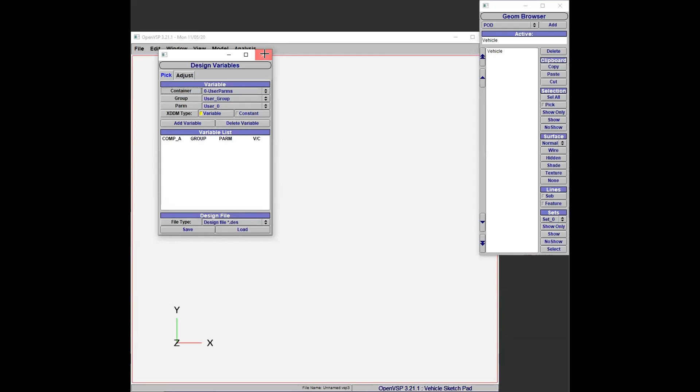There are design variables that you can list out here. Those design variables get integrated into the optimizing algorithm, so it can cyclically optimize the variables as you want. I'm not going to talk about optimization of the aircraft wing or anything, just want to highlight that.

The most important one is here, where you can see the mass and inertial properties of the designed vehicle. Most of all, you'll use the VSP Aero module, which is for aerodynamic analysis of your model. With that, let me go into the other tabs you have here, and you can see what they do.

So how do you add the vehicle model? The vehicle model isn't exactly the model, but the components are already there. I'm going to show you that. For some reason, I can't drag it down. Oh, I'm sorry.

Okay. Is it okay? Can you see it now? Okay, yeah, we can see the screen.

All right, thank you. So here you have plenty of components you want, like the fuselage, the wing, and some stack blank items. The propellers, if you want, are there, and discs of different types, like a box group to add inside the vehicle so it represents interior objects, mostly for weight analysis. You can add components like boxes and different types of ducts for the engine part, and also add seats and pod mounts and so on.

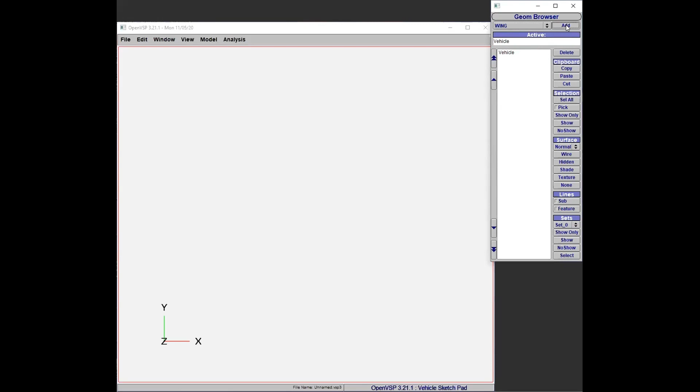Mostly what I use is the fuselage and the wing, and the wing can do everything you want. So let me go with the wing and then we'll see the rest. Click on the wing and then click add, so you get the wire version, or the wire view, of the wing section only. Now you can click on the shade here.

You see, if you select shade, it will give you the shaded version of the wing. Let me drag this thing down. You can call this a blended wing body type of aircraft.

Now there are different terminologies you may see here. I will talk about that. We have the airfoil, first of all, the airfoil at the center, and the other airfoil at the tip. I'm not sure whether you guys have the basic terminologies of aerodynamic components, like airfoil, ribs, span, and chord, and so on. If not, just stop me somewhere and ask me what it is.

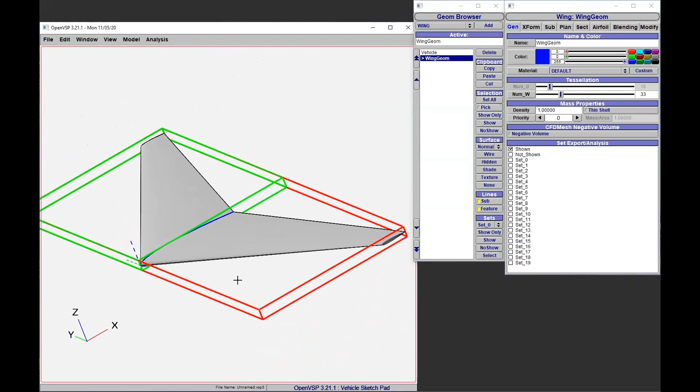So now we have this thing. Before I go into modifying it, the wing span is the distance from this tip, the lower tip to the upper tip. And you have the length, which is right from here up to the end - that is actually the chord length of the airfoil, the central airfoil.

So you can modify this, but if you want to see the length of your wingspan, you just go into the plan, click on the plan, you see the span. This is the total span you have.

By the way, I didn't tell you that OpenVSP doesn't have a specific unit for you. You can assign yourself whatever unit you want. Like if you want to go with the centimeter, this is like 18 centimeters. So you can do with that, or maybe you can go with feet, inch, whatever you want. But you have to keep the consistency of the unit when you do for the rest, once you decide in your mind.

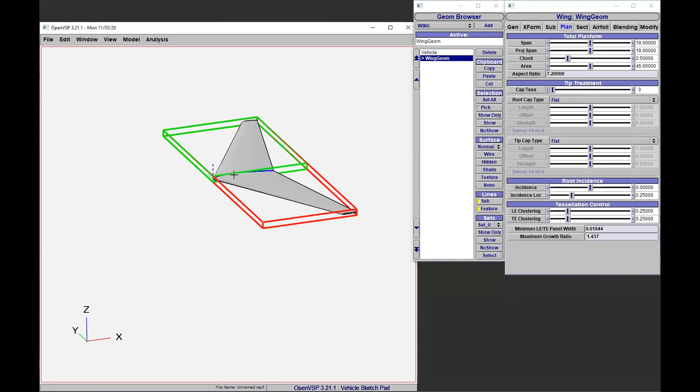And the other thing, as I said, OpenVSP is for vehicles that have a maximum speed of Mach 1, which is not more than the subsonic level. If you go more than subsonic, the solvers you use for aerodynamic analysis of the vehicle don't work well. There are so many assumptions you have. That's why OpenVSP is limited only for the preliminary and conceptual phase of any vehicle design.

So you got the span here. Let's say this is 18 meters. So keep in mind that we are working with meters, and you have the projection span, which is the shadow of this span on the ground, which may not be the same as the span of the aircraft itself if there is some dihedral type of shape.

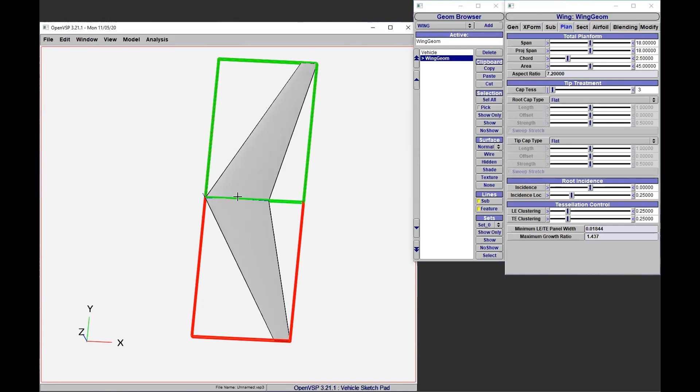And so you have a chord, which is the mean chord in this case. The mean chord is the average of all the chords. You have the chord lengths of the central airfoil, the chord lengths of the tips, and so you get the average of that. That is the mean chord.

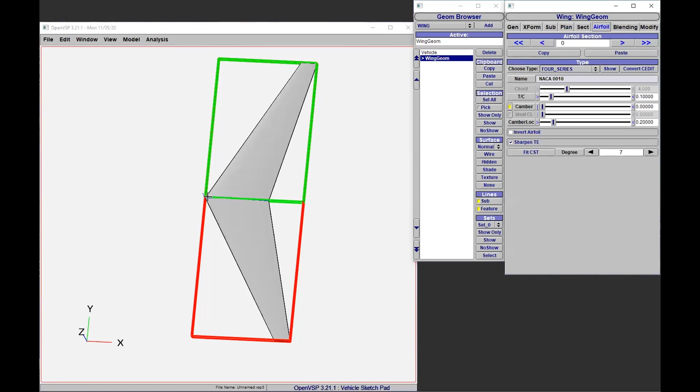So now you can drag this one if you want. Like if I want to modify this one, I just go to the airfoil because this is airfoil. Now airfoil 0 is for the central part. So I can drag this. I'm sorry, I have to go to the section part because I have to increase the length, not the thickness. So the section, normally the section is what you see in green, is one section.

If you have a split of that, let's say I have a split now, so we have 2 sections now. So click on the wing back. By the way, you can rename it also. You can call it whatever you want, BWB. You can call it, and if you leave it, it will name itself. So you have a section right here.

Now I want to extend the central airfoil length. Go to the section, and this is the section now we are talking about. The section has now, this is the section planform. You can see here section planform. You can increase the span. The span means the length of the section itself. So you can increase it if you want.

Or if you want, also you can increase the airfoil. There are 2 airfoils of the section, the external and the internal airfoil. The external one is which one? It's just outside of the central part. So this is the central here.

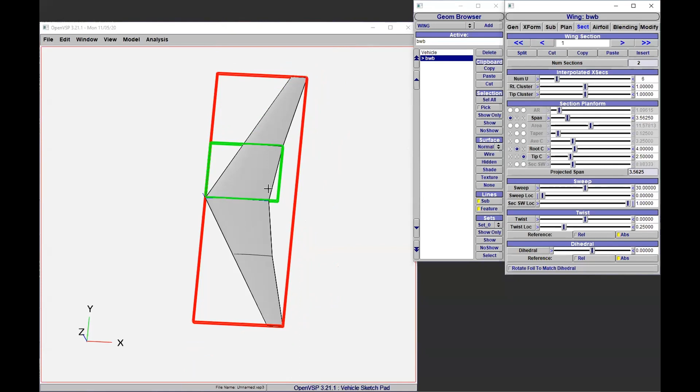Now let's do some tricky things. I mean, that's not tricky, but you can modify the length of the airfoil right here. You have a root chord and you have a tip chord. The root chord is for the central part. Always toward the center is the root. So you can right click, I mean drag the chord, so you can increase it as you want.

And also you can do the same for the tip. The tip by now is this one. It's not that one because we are talking about the section. You can also drag that as you want.

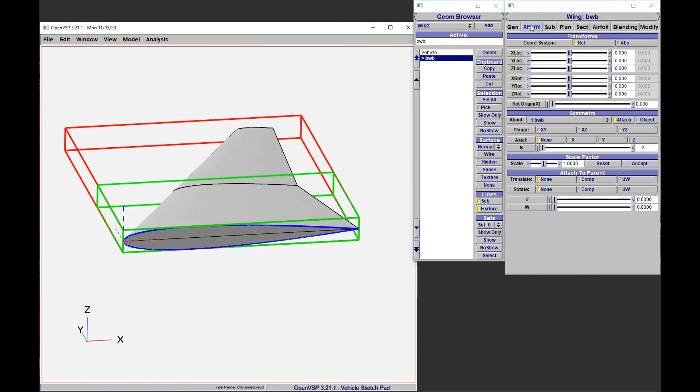And if you want to increase, by the way, I can show you this is symmetric, so I can cut it into half. So I can show you only one wing because everything you did for this wing applies for the other wing. So you have symmetry, right? If you click on the second tab, you have symmetry here. This one, you can click the symmetry, you can see it. You can avoid it, whatever you want.

So, but anyway, if you want to see from the side, it's better to have a single wing, one side of the wing. So now let me, by the way, there are some tabs that you need to click to view your vehicle from different directions. In the view, you can see here mostly the F5, which will give you the top view, and F6 that will give you the front view.

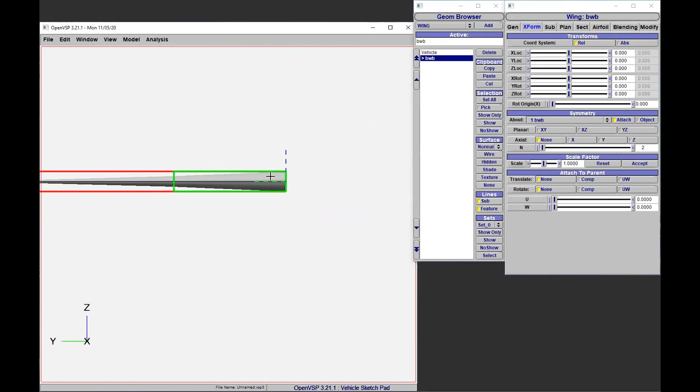You can go through this. This is the F7 side view and so on. So I'm going to go with the F7, the side view.

This is a symmetric type of airfoil, and usually this type is used at the tip of the aircraft because it doesn't produce any lift at a zero angle of attack. So we normally use that at the tip to avoid turbulent flows of air on the tip side.

So I can go to the airfoil now. I can increase the thickness of the airfoil, like you see here. I can increase the thickness of this airfoil as I want. You can drag it, or you can give the number here.

Remind you here that we have no unit specific, but keep in mind that you are working with a certain unique unit in your mind.

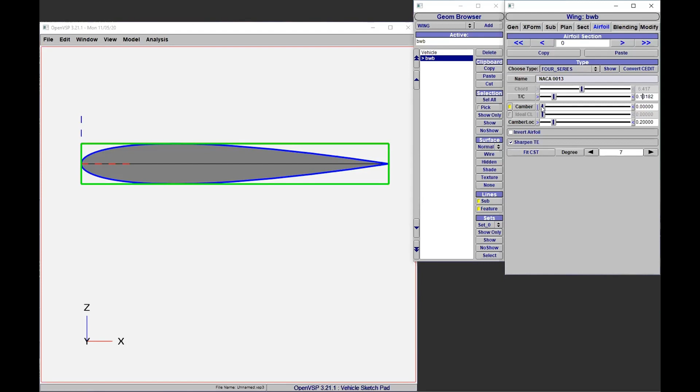So the other thing is, there is no camber for this, it's symmetric. You can add the camber, you can bend it as much as you want. And you can also decide the camber location, the maximum thickness location. You can drag this one, the maximum thickness will move back. If you see, it will move back.

This actually depends on what you want to do, in which area of the wing you are applying this airfoil. You also have options to select from the type listed here. You can choose from this whatever type of airfoil you want, so it's up to you.

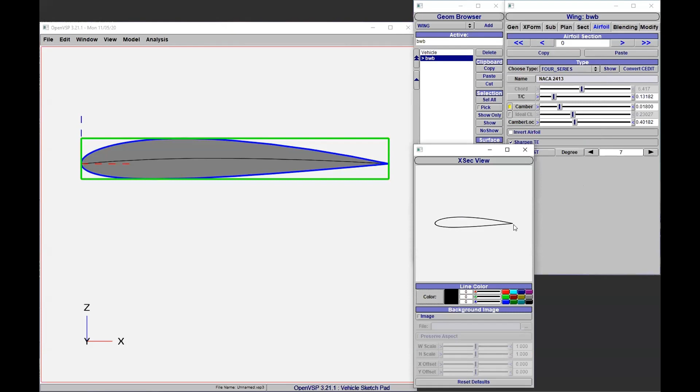Also, you can see this line view of the airfoil you are working with, and if you change the thickness, you will see the change also right here. Especially if you don't have this view, you can directly view it right from the show. And the other thing is, let me bring it back.

There are some tabs that I don't use, like the Convert CEDIT tab. There's an invert airfoil also here, but I don't know what they use that for. If you click here, you can design.

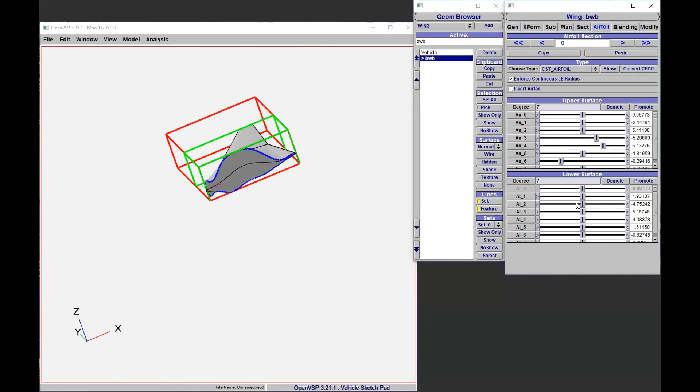You can give each point of the airfoil by yourself, and you can modify it as you want. Especially if you are doing this blended wing body type of aircraft, you have to design the interior part by yourself manually because of your own special interest. The central part is not basically for aerodynamic lift, you have to primarily look into what you will have in the interior, what components you have.

So you have to determine whether the thickness of the central airfoil and the subsequent ones close to the central should be enough or not for the objects you want to load inside the aircraft. So that's one thing you see here, you can select different types as you want. The best thing about this OpenVSP is that you can see the changes right away. It's parametric type, you can just give the number or drag the scroll, and then you get the shapes you want.

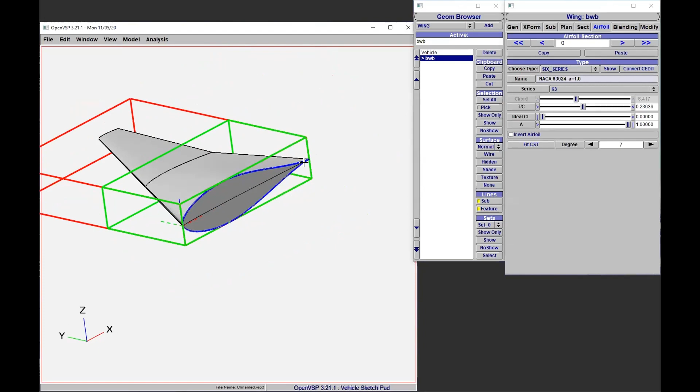Now, what else do I have to see here? This actually is to move your section or the wing itself to either X, Y, or Z, or you can rotate it. Now, if you drag this one, you're moving the wing back, especially if you have the airfoil. Let me add the fuselage.

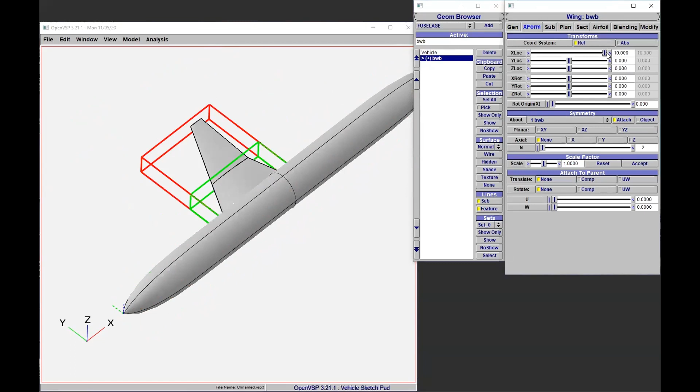Let me add the fuselage and see how we can do that. Let me go to the shade. Now the shade, so I can move the wing backward. So I'll click on the wing part and drag it backward. If it's like at the end, it's not end actually, you can click on the arrow and then you get more, you can move it more back.

There's no problem in that, and also you can increase the size, as I said, and you can bring back the symmetry. And now this, if you see, like I can do this, I can hide this one. You can hide this one if you want, no show, you just click on no show, so you can see here.

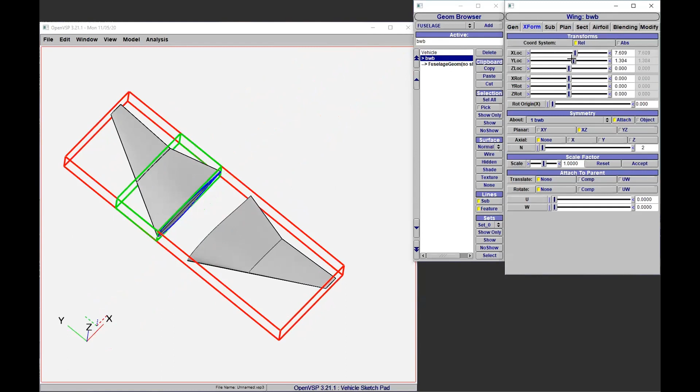And now I want to move the wings apart because there is a fuselage there. So click on the wing and go into this XForm, and then if you drag this one, the wing will move apart. Now bring the fuselage back, you can see it, NoShow. So you can see it now. You can move the wing as you want.

By the way, OpenVSP is not only for aircraft, it's for any like rocket design, for ground robots, like underground, I mean underwater type of vehicles. For anything you want, you can design right here in OpenVSP.

I mean, for the design part at least, the aero part is not so important. Now I can cancel the fuselage, I don't want it now. For now, I'm going to deal with the wing.

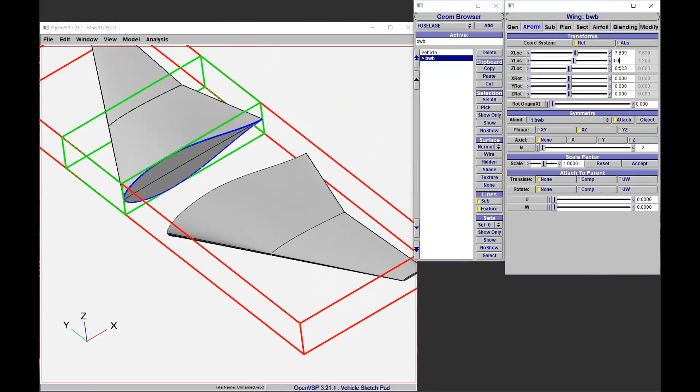So bring back the wings together. This is a blended wing body type. Now we did that, and also if you want, you can change the colors right here. You can go into color and change whatever color you want from the drop down right here.

But it's not that important. And also indeed, if you have different components that you want to visualize, you need to have different colors. So that's it, as I said, the section is there.

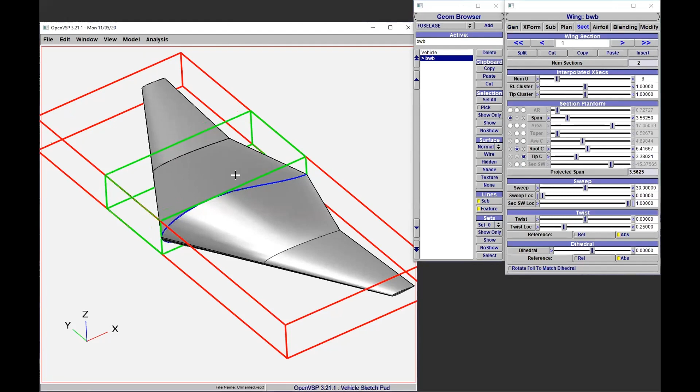One thing I have to talk about is the section. Actually, it's one more thing. Now we are dealing with this section. I think this is not visible. Let me change that into the default one.

Well, yes, now the top view. One thing I did here is it has to come to the origin. You can drag it, you can zoom in and zoom out. If you hold the scroll button of your mouse, you can bring it out and in.

And also you can do other things with the right click and left click. The right click is actually to move it, I mean move around. And then the other one is to rotate. The left click is to rotate, and you can exercise this.

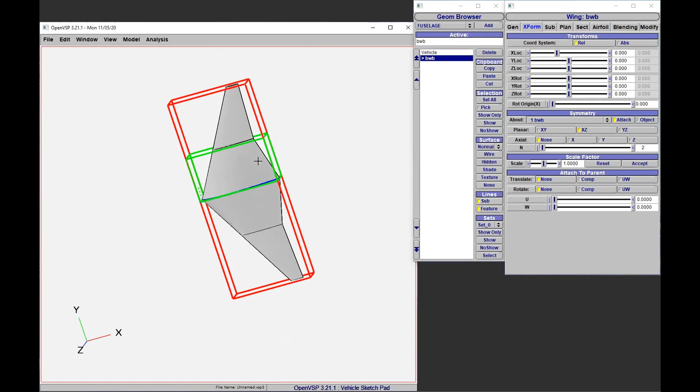Now let me go to the section part. I'm talking about this section, and let me give the front view. The front view of the vehicle is like this.

The importance of this dihedral is, if you want to make enough lift during roll, you have to design the vehicle in such a way that the wing somehow bends upward, so that when it rolls, say for example to the left, if you have a bended wing right here, you still have some lift generated by this wing side. So the dihedral type is very important.

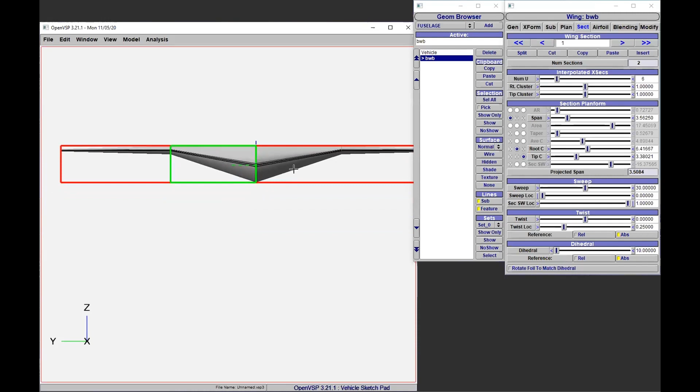It actually depends on the type of mission the aircraft is designed for. The dihedral is there, and also let me go into the... so we did this.

The dihedral is there. Also you can twist the wing, especially the outward wings. This wing at the end, or the tip area, you have to twist it somehow upward from the back, from the trailing edge, because if the aircraft is to stall...

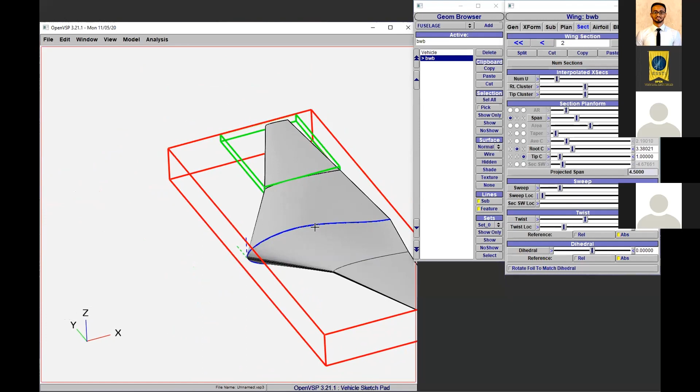Normally you have the control surfaces like aileron on this tip. If the aircraft is to stall, it has to stall in the interior part first. And if you twist it up, even though the aircraft stalls in the interior, this surface still generates lift, there is airflow on this surface. If there is airflow, then the control surface like aileron will bring the aircraft back to normal. So normally they do twist for that reason.

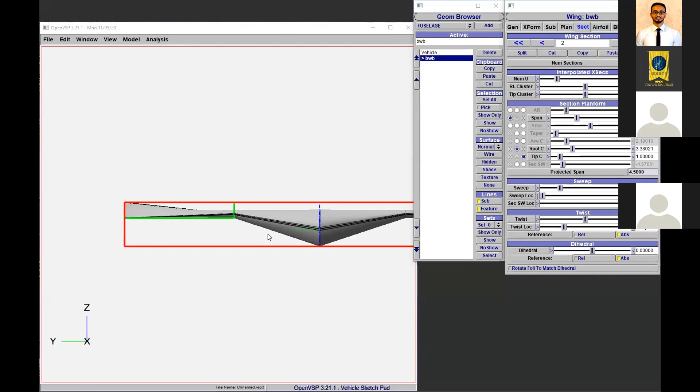We have to twist it up. So this is exaggerated indeed. As I said, if the angle of attack is very high, the aircraft stalls because there is not enough lift generated by the aircraft surfaces over the central part.

As you can see here on the tip, there is still the surface which is touched by the wind, which is called the wetted surface for now. The wet surface is the surface on which the wind flows. So at least you can have control of the aircraft by the ailerons you have at this area at the tip. That's why they make a twist.

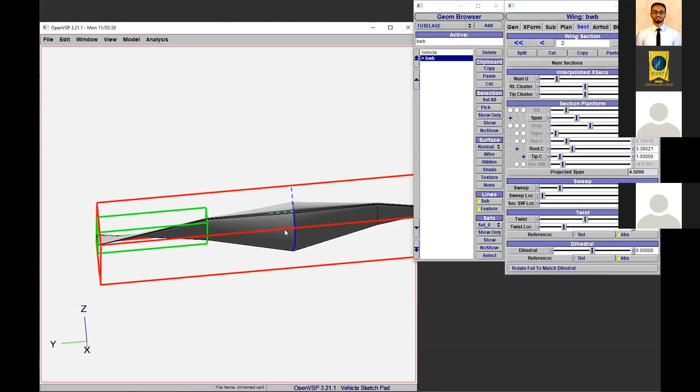Anyway, we'll bring it back to normal. We don't need it now.

The other thing is you can go to the blending. Blending is normally used to smooth the leading edge areas and the trailing edge areas.

For example, let me add more sections into the aircraft, click on section, and split it. Let's say this tip is rotated—I mean shifted back. That should have been a sweep back instead.

So if you want to get back, you just click on undo, edit undo, and you can get back to the original shape. Now let me sweep it back.

If you sweep, you give more angle of sweep, say 50. As you can see, the edge is not smooth here, and also it's not smooth here.

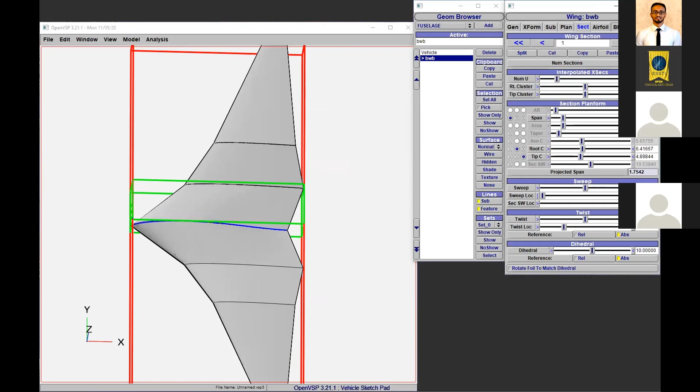If you want to smooth it, and if you're satisfied with this shape, you go to the blend—there's the leading edge and also the trailing edge. The leading edge of the aircraft is at this edge, and the trailing edge is there. So you can smooth, for instance, this cornered section.

Let me go into the leading edge and select the outboard. You have options—you can use angle to make the leading edge smooth. For example, an angle of 40 may not smooth it that much, but it tries to smooth it somehow.

If you reduce this down to 20, you'll see a more smoothed shape. So you can use angle, or you can go into the outboard leading edge. The outboard is always from the central section to the tip.

Now we are here on this airfoil—the outboard is this one. So you go into the outboard leading edge. This is the trailing edge, so we don't do that now—this is the leading edge.

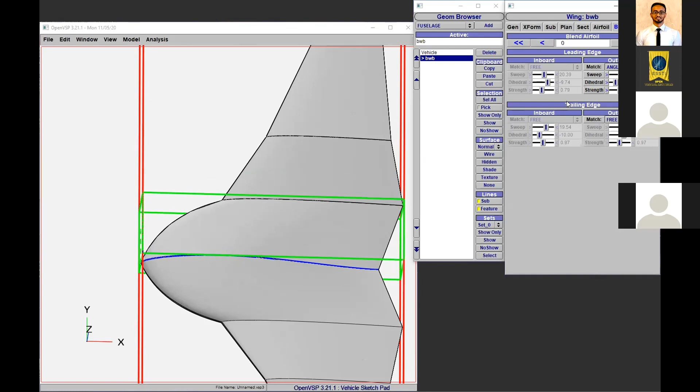So you can go and add strength if you want to the leading edge. You can add the strength, but that's not enough—I can't see much difference indeed. Okay, we'll see in the others.

If I go into the other airfoil here, let's say this has to follow the inner leading edge, which is this one. So whatever you have in the outer part of the airfoil has to follow the inner one. That's how you get that type of smoothing.

You can increase the strength, but normally that will mess up everything if you're not careful. So we have this, and if you want to scale any airfoil, just click on modify here.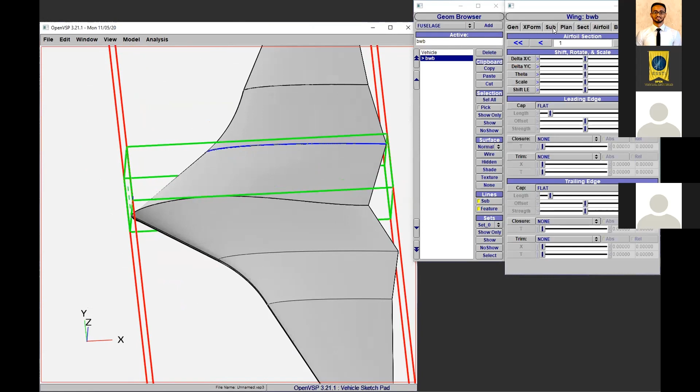Click modify, and you have shift, rotate, scale options. Shifting means you can shift it backward—let me go with one of the airfoils like here. Now you see the blue line showing the active airfoil we're working on.

So you can scale it if you want—go into the scaling and let's say 1.5, and see what happens. As you can see, it scales in every direction, including the thickness, not only—

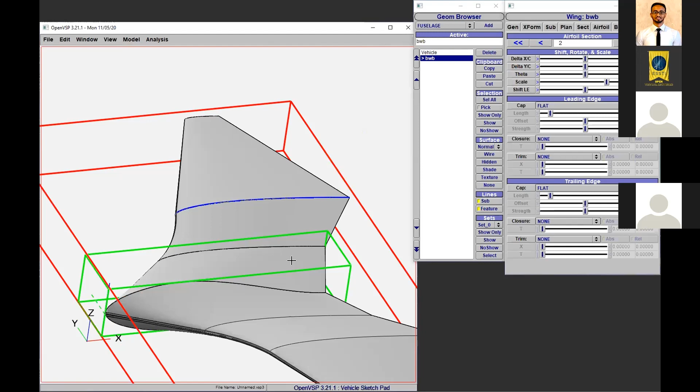The tip of the aircraft is actually designed for a specific purpose, like reducing some turbulence.

Now with that, you can go through everything: the leading edge, the trailing edge, you can modify, and there's also blending for the trailing and leading edge. We have different types of airfoil selections, and you can add your own airfoil if you want.

You can click on here, I guess this is on airfoil—click here, and you have to click read to bring in the airfoil from your own source. Actually these are enough, and there's no specific need to bring in airfoils unless we design a special type of aircraft.

Oh, I can get back to the original shape. Now, is there any question? Please, if you have a question, raise it before I go ahead.

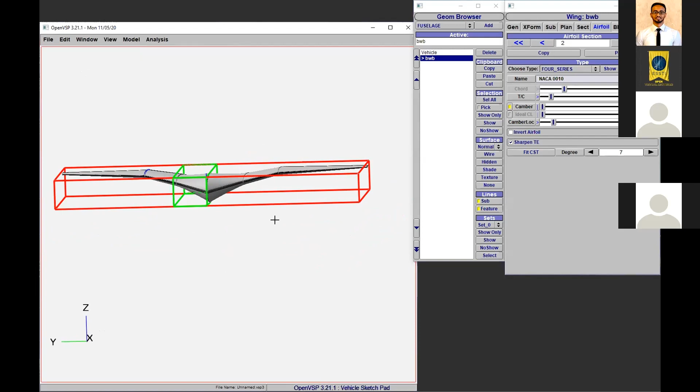Any question? I'm going to go on to how to create the control surface, the aileron, of the UAV or aircraft.

So if you don't have any questions, let's go to the control surface. If you see here, there is a sub-surface. You can click on it, right here it says control surface. Don't go with the line, rectangle, and so on. You just go with the control surface because we're going to do the control surface design. Click on it and then click add.

Now see that the ailerons are right here, but you can shift them span-wise. You can shift it like this, and also move that one to the tip. Move it.

You can also increase the area of the control surface depending on the control and stability of the aircraft, or normally that's what you have in mind. Sometimes after you do some aerodynamic analysis, you'll see that the control surface assigned is not enough to control the aircraft, so you have to add a bit more surface by clicking on the chordwise direction. The chordwise direction will give you this - like only 25% of the chord length is used for control surface. You can add that if you want, like this, using this.

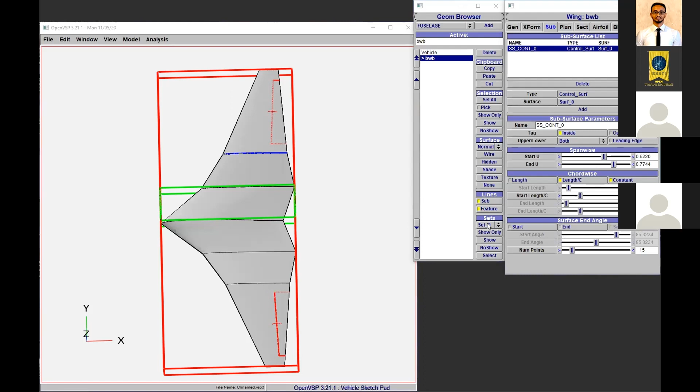The other thing we'll talk about is how we can put the angle of the ailerons in VSP Aero. Now I have to go into the simulation after we do this aircraft design, and we satisfy ourselves that it's okay. Then I will go ahead with VSP Aero, the aerodynamic analysis of the vehicle.

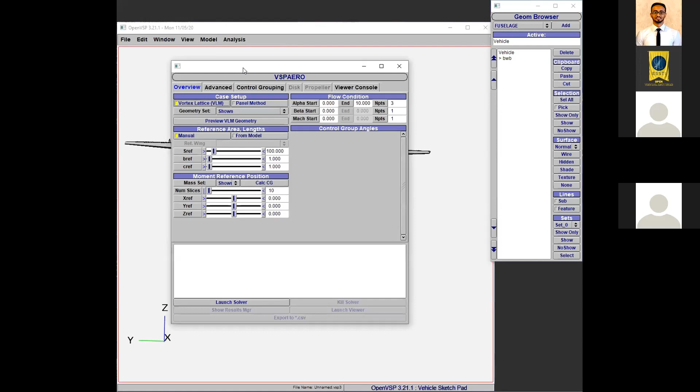Now go into the analysis, click on analysis. This is the third-party module which is integrated to VSP. VSP Aero is very powerful, at least for the preliminary and conceptual phase of the design. Click on it, and it gives you an overview. What you see here is the vortex lattice - this is the solver. This is the one that solves the pressure distribution on the surface of the aircraft.

There's also another solver called the panel method. You can read about the vortex lattice and panel method approaches for solving pressure difference on the surface. Normally, whichever you use, you have to have the meshed surface of the aircraft. There is a geometry mesh - if you go here, I'm sorry, if you go here, the CFD mesh, FEA mesh, and degenerate geometry mesh is for vortex lattice. Normally people use this one, the vortex lattice, rather than the panel method.

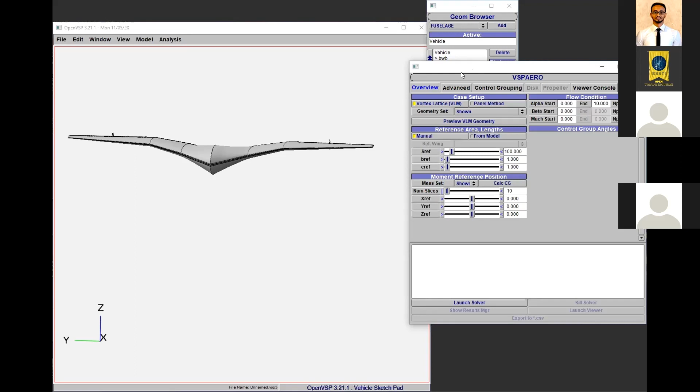The solvers are there for you, you can read about them and go with whatever you like. And here you see it says show, which means in this case you have different types: all, show, not show. Show means you do the aerodynamic analysis only for the shown part of the aircraft. You can hide some components of the aircraft.

For example, I can add the fuselage, and the fuselage is there, but I will go into the fuselage and say hide or not show, then click here and go into the analysis of VSP Aero, and then you see show - this means only for the wing or BWB part, not the fuselage. If you want to add the fuselage, you click on all. Not show is only for the fuselage, not for the wing or the BWB. So I will click show.

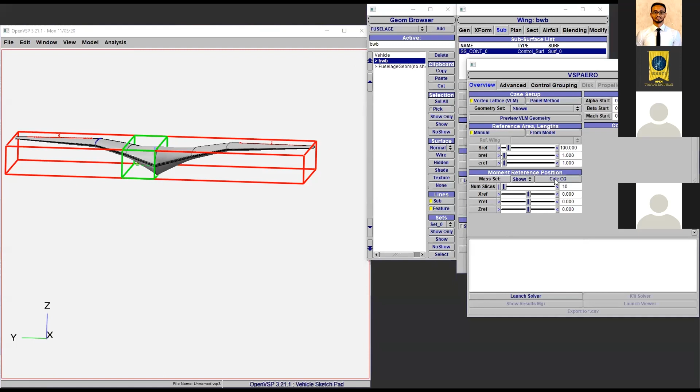Also you have the CG, the center of gravity of the aircraft, which can be calculated. If you click here, you can get the center of gravity - the X location, Y location, and Z location of the CG of the aircraft. Later on we'll see that. Also, you can calculate center of gravity only for the shown part or for all.

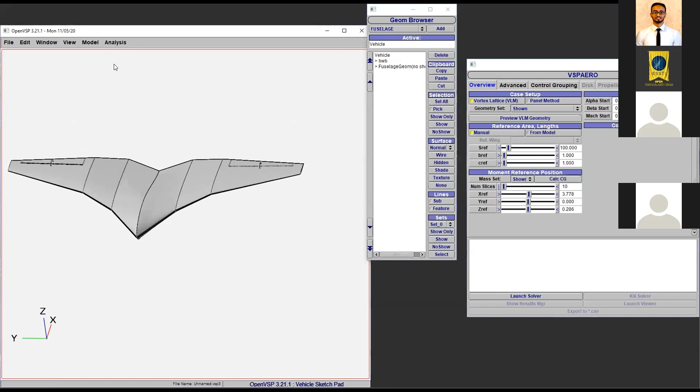You can do that. Now, by the way, you can see the inertial and mass properties of this thing. If you go into the mass prop - right click analysis and then go to mass prop - you can do slices to get a distribution, inertial distribution. Now you see here there is a mass and the inertial property of the vehicle design.

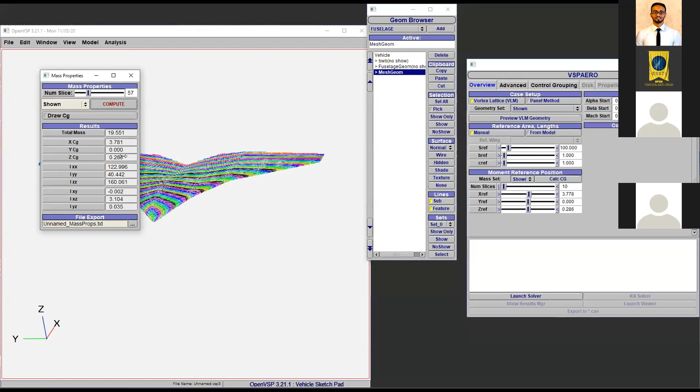Now the inertial property is also there. Now you get this one - don't be panic, you can cancel this one. This is just the meshed or partitioned part of the aircraft to get the calculation for mass and inertial distribution, so you can click - it's right here - and delete it if you don't want it. That means now the BWB is not shown, but you can click on it and then click show, so you get back what you want.

Okay, now let's go with the aerodynamic analysis.

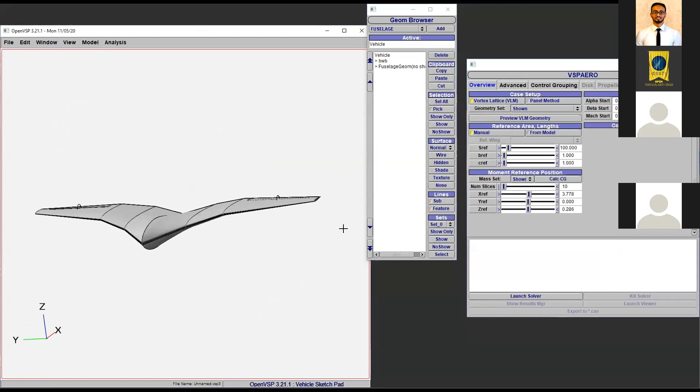Okay, now let me go into the aero analysis and the VSP. As I said, I have everything in here. There's also alpha here, which is the angle of attack for calculating the aerodynamic performance of the vehicle for different angles of attack. Let's say I will start from -5, which is nose down, up to 15.

Do like, say for example, 10 times. Now beta is the side, and for now, let's just consider only the aircraft, the airflow in the direction opposite to the direction of flight of the UAV. So the other thing is the Mach. You can calculate the Mach number based on the maximum velocity of the vehicle you want.

Normally you have to come to this design after you do some analysis on the wing loading and the weight-to-thrust ratios and so on. You have to have criteria for designing this vehicle. Those criteria are like the maximum speed, the turning angle, and so on. So you bring the maximum speed you have, and you can calculate that if you want.

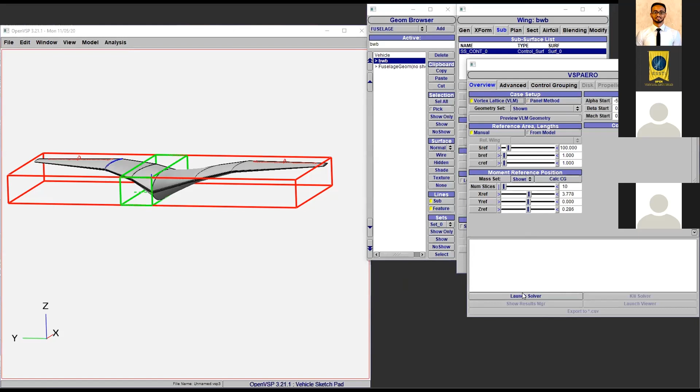And I'm going to launch the solver. For now, the solver is Vortex Lattice, but if you want, you can click on this one. But the best one I have seen is the Vortex Lattice, for me. So, okay, I'm clicking on the launch solver. The solver will take a bit—no, it's very, very fast, because the sections we have are very few, so the shape is not so complicated.

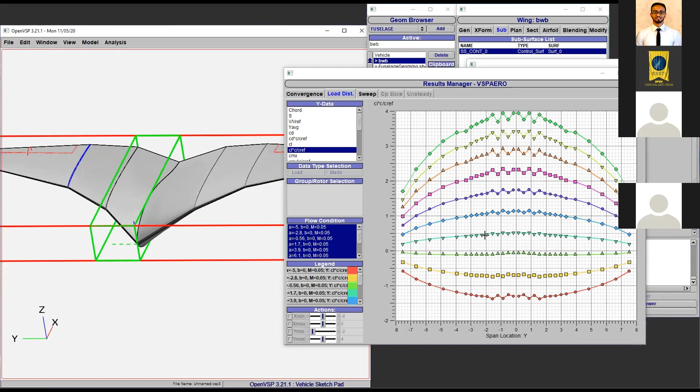This is a blended wing body. There are no open surfaces, everything is watertight, so no problem, the solver can do it in seconds. After you are satisfied with the output of the results, you have to give more sections or tessellations. I will show you the tessellations into the aircraft, so you get a smoother surface for the aerodynamic analysis, and you get more refined values.

So for now we have this, and this shows you the wingspan, the lift distribution along the wingspan. When I say wingspan, I mean the lift distribution on the surface from one tip to the other. So you have negative 8 to 8, which is one tip of the wing at -8, or whatever unit we need, and the other end is at 8 meters—probably 8 meters, not sure. Whatever you need to use, you can use it.

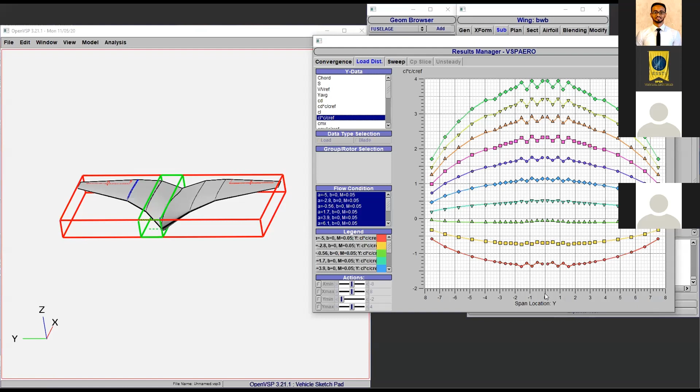Now you see there are some problems around here. The airflow is not smooth, the lift is not uniformly distributed on the surface. So you know exactly where it is, it's around 0, the central part. It's because there are some curvatures there in the lift distribution, and some drag and interferences will affect the lift distribution. So you have to go back and redesign the surface to get a smooth distribution.

Now the other important thing is the load distribution on the surface. This is good - most of the load is distributed around the center where the airframe of the aircraft is stronger. Around the tip, if you get a highly peaked lift distribution, you have to be careful, because otherwise the structural integrity of the vehicle will not be in good condition if you fly it. Sometimes the aircraft may get flown apart up in the air, so you have to be careful. This happened in the past to some of our friends - but this is a homemade type of UAV, so it doesn't have any real effect.

Okay, then you can see here the distribution for different angles. This is for -5 degrees, and the others are intermediate, and this is for 15-degree angle of attack. For 15 degrees you get high lift distribution, but the roughness of the distribution around the central part increases as you increase the angle of attack.

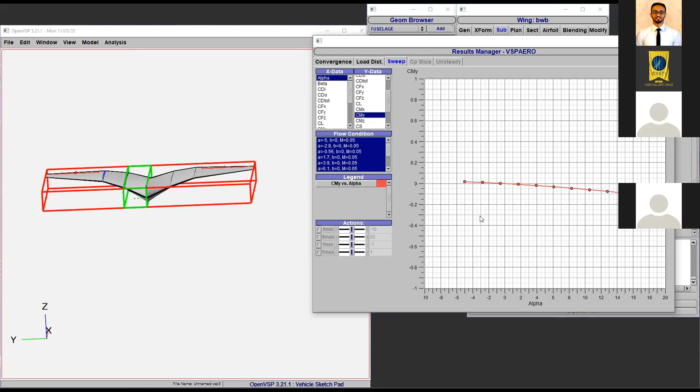Otherwise, if you get a positive slope, you have to somehow move the center of gravity, or sweep back some sections and recheck the tendency of the pitch moment. For now it's okay, but if your aircraft is mostly for long flight, like level flight, you have to see at 0 angle of attack what is the tendency. It's almost 0, right? This is very important - the aircraft will not pitch down or pitch up, so it looks like a fuel efficient type of aircraft in this case.

This is just fortunate, but anyway the design is not that interesting. But what is interesting is that we get the negative slope, which is very important - so we can say the aircraft is stable. And so you can do the other things.

You can compare alpha with the drag if you want - the drag increases as angle of attack increases, this is obvious. And also there are side forces, like the force from the side on the aircraft - we don't have that much of those forces.

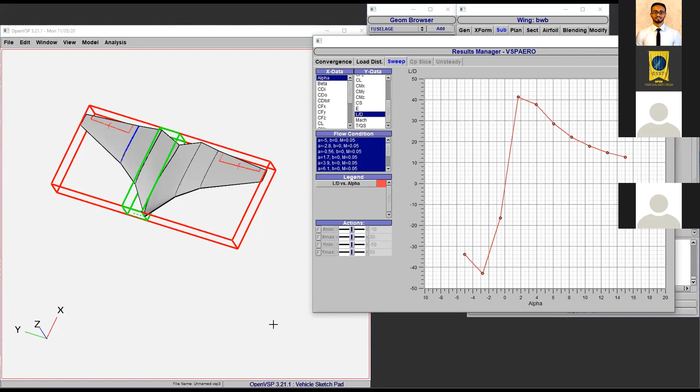Oh sorry, I forgot to tell you the other part. Click on it, yeah it's already there. Okay, now there is another one. The result you get now is from here, whatever we see is from the result manager. There is another one, the launch viewer.

You want to see the pressure distribution on the surface, click here. Click on it and maximize it. Go to the legend, you will see now the pressure distribution.

I'm going to show you the pressure distribution. But before that, I want to show you where the center of gravity is. Draw the center of gravity. You see the red dot right there, that shows you where the center of gravity is.

Now, with respect to this center of gravity, where is the lift distribution high? Is that at the back or the front? Those things are very important, and you can get the number if you want.

Oh, I'm sorry, there's something wrong going on here. Is that from you or what? Hello, can you hear me? Any problem? I have to go ahead anyway. I will go, you can proceed.

All right, thank you. So I have to go to the arrow pressure distribution. Now you see, by the way, this is the pressure differences, the lower pressure minus the upper pressure. You have these pressure differences.

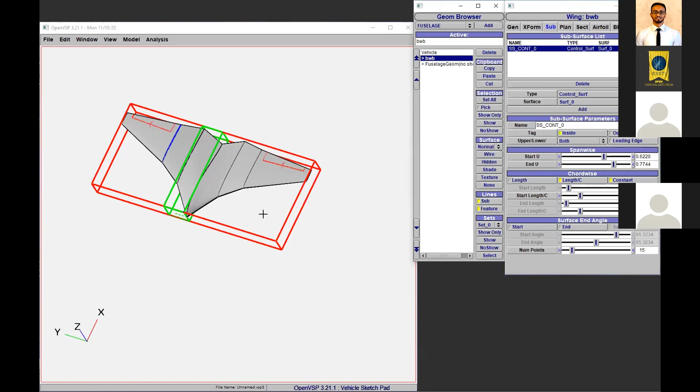So I'm going to go to the aerodynamic analysis again. In the aerodynamic analysis, you add the control surface. You have from the control surface left and right, and pass them. You can add into there.

And now you go back into the control surface, the angle can be given here. If you give a 30-degree angle on overview, that means the right aileron will deflect 30 degrees up, and the left aileron will deflect 30 degrees down. Or you can change that. If you go here, you can change the sign, the negative and positive.

The negative is pitch down, and positive is pitch up. You can do that. Now, for now, if you just leave it like that, normally what it calculates is one of the wings is up and the other wing is down. So you can see the roll and the other effects there. Or if you just want to see the pitch, make one of these negative so that both will pitch down or pitch up.

Okay, for now we have this. We add the control surface. So we go into here, we added the angle 30 degrees, and we have the CG calculated already. Now, for the advanced part, I'm not going to tell you in detail, but what it does is it will calculate the stability and control of the aircraft.

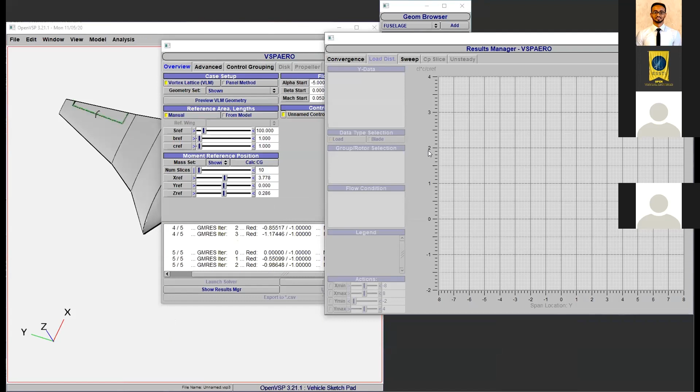So let me go into the control and the overview, and then let me do the solver, and we'll see the distribution. Now you can see that it's not symmetric, as compared to the previous one, because this aircraft is now rolling.

The aircraft is rolling, there is a low lift distribution on this surface and higher lift distribution on the other one. And so that shows actually the rolling effect. Now, it depends from which side you see, but it can be the roll right or roll left. What you can see is just the distribution is not uniform, it's asymmetric.

Now, as you can see here, the lift to the pitch is still negative. The slope is negative, that is fine. And we have the roll. Now, this one for the roll moment, you can see here. So you have it there. And actually, you can do your own analysis on this.

The 30-degree gives you this much distribution. Is that what you want or not? It's based on your own specific design objective. So you can play with the others like drag and so on as it rolls, but mostly this is like a lift to drag ratio with angle of attack and the pitching and the roll moment and the others. The yaw is now there because the roll is always combined with the yaw, so you get the yaw also there, which is unstable in this case.

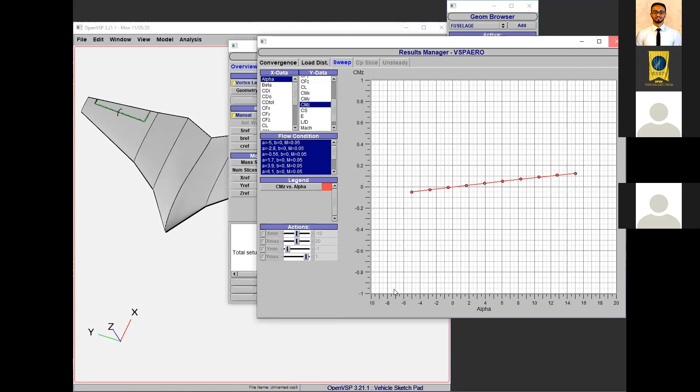Okay, and also if you go into the solver and the viewer part, you can see that the distribution of the pressure on the surface is not uniform. More lift is on the right wing surface than the left wing surface. So it is like rolling towards the left. The aircraft rolls towards the left. That is how you can see.

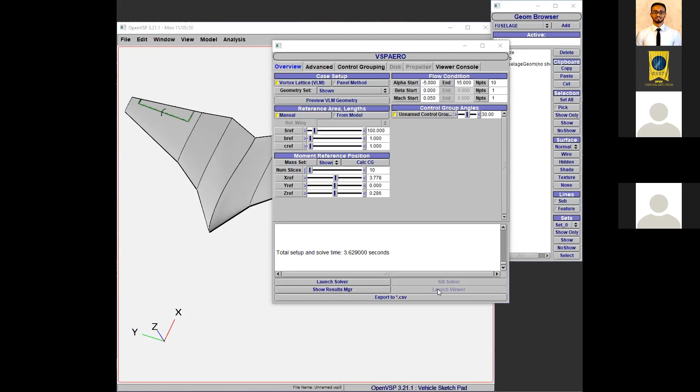Or you can change the angles, or change whatever you want in the parameters before the aerodynamic analysis, and you can see the trailing edge. You see the airflows are not the same now because of this rolling effect, and you can see for different angle of attack how the air flows on the surface as they roll, as the aircraft rolls.

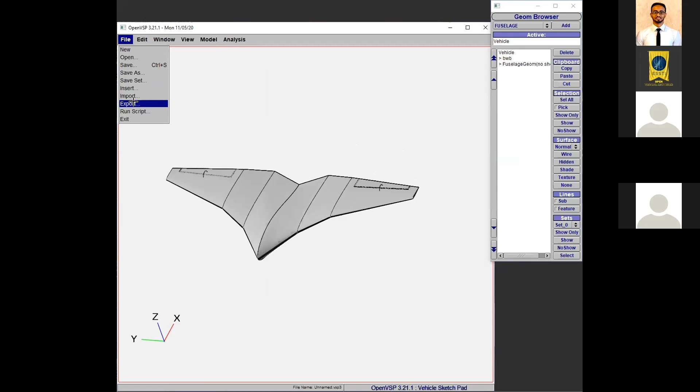Okay, now we're done with this, and the only thing I want to show you from here is how to import and export. Now you can go into file and then click on import, or you can export this in different file formats. Like if you want to take this into CATIA, you can export it as IGS. That's what I normally use.

If you want to export it into ANSYS or Blender, you can export it using OBJ. Let me go with the OBJ for now, and I will save it somewhere in the file. I have one OBJ there for the hybrid, and I make sure I use that one. I can call this one test one, and it will add the extension by itself, so no problem.

The OBJ is there. One thing I didn't tell you is that it asks whether to show the shown part or all parts. I will just say the shown part only. So for OBJ, you get test one, and that will go into where we want to save it, and you can cancel out this one. We don't need it, and you just click show.

So the file name of your vehicle is here. We didn't name it yet, but we can save it. There is no name given to it; this is the default name, unnamed.vsp3. So you can save it anywhere you want, normally in the folder of OpenVSP itself, and then anytime you want, you can launch it.

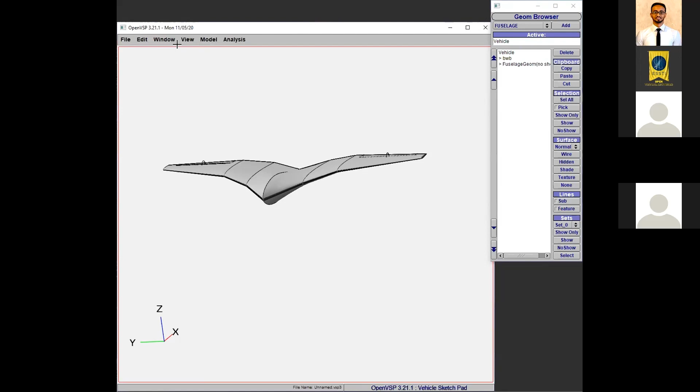The other thing I didn't tell you is how we can add the background, which is very important. You can add the background by clicking on here, going to background, then image, and then click on the file, and go to, say, for example, what do I want to add.

Okay, the white one is not that important. Let me say background itself. I click accept. Oh, I'm sorry, it screens out.

Screen sharing has stopped. Oh, I'm sorry. Can you hear me? The screen sharing is stopped. Let me go back again. I'm sorry, there is something wrong with the display. Okay, let me share it again. Okay, I hope you see it now.

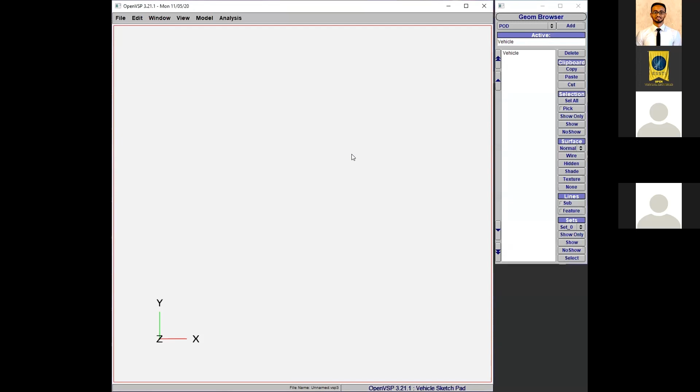Let me go into my file, which I have been working on since yesterday, just for fun. Okay, I'm bringing that file. A lot of things are there. I want to delete these old things; I don't want them.

This is somehow intensive, but okay, I have this design. This is the shaded part, and also I don't want this one.

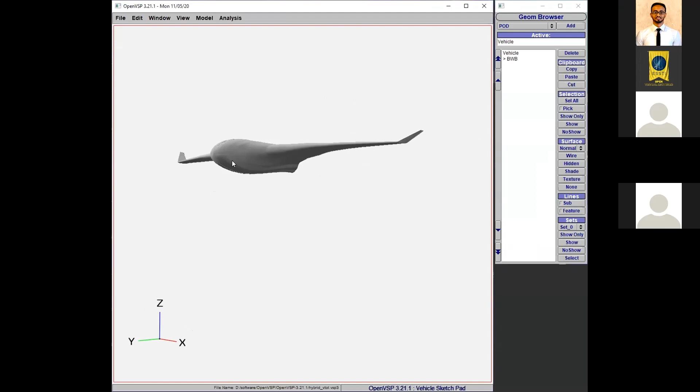This is the blended wing type of UAV I designed for my own project, for agricultural purposes. We're going to put the cameras beneath the aircraft, on the belly of the aircraft, and the wing is very long. We have the tips designed this way so that we can avoid some airfoil air turbulence.

So anyway, this is the design. I did the background before, and I'm going to bring the background, but I'm sure it will not crash again. I think the window crashed, and that's why it kicked me out of Zoom.

Let me try to bring any file. Let's say, oh, why not. Let me just click on back and let me see. Oh, I'm sorry, can you hear me? Yeah, we can hear you. Okay, I'm sorry, let me do it again. There is something wrong with my computer. It crashes; I think the problem is with my own machine, it's nothing to do with yours. So let me try again.

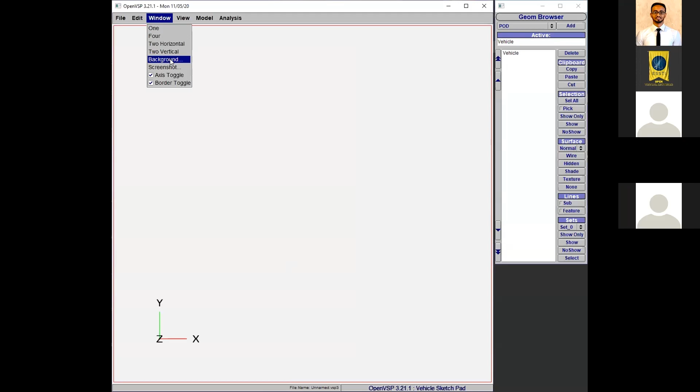Okay, let me bring the window first, the background, if I can. Let me go into, say, I have one background saved in D, in the image folder. I did this before and I don't know why it crashed. Okay, I got the background.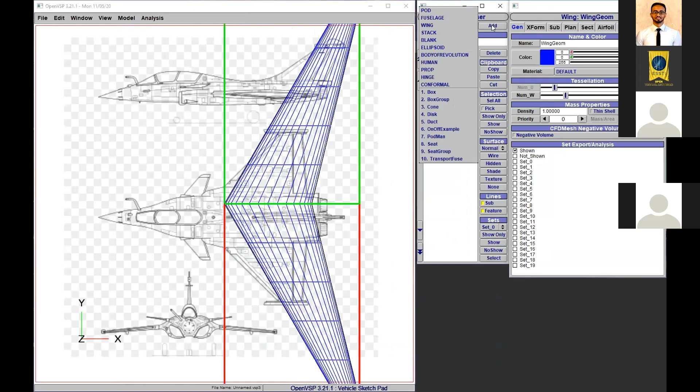You can offset to X and also to Y as you want. For now it's okay, I'm going to just cancel this one and you will remain with that. I will bring the wing and click add. You just select one of the components you want and click add to bring that into the window. Now we have this, so I'm going to design it.

Where is that section? And the root section increased. You can move this, the whole aircraft forward, into the tip, and then you can increase the length of your root section, say to 24. That is huge, and you can drag all the others into... where is that? That's it. Go into the other sections and do the same thing, just fit into the structure.

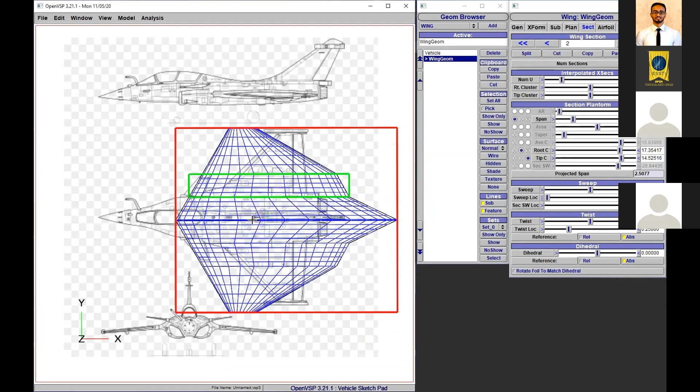I'm not going to waste time on this. You can finish up with the top view of the fighter jet, and then you can click on the side view, which is F7. You can go into view, and you can see that F7 is here. So the aircraft will give you the side view, because we have the side view of the fighter jet, and bring it that and go into the thickness and everything, and you can shape it that.

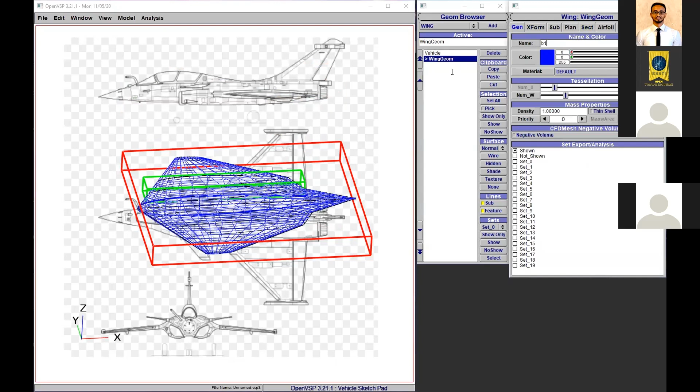For this part, we have to add another component that I didn't tell you. You can add another wing if you want, and just call this one to be like B1. I call it B1, and then I have to add more wing, so that I can bring this wing, only one section of this wing, cut the other section, and rotate this one about the x-axis by say 90 degrees, and so you have it there.

Now if I go to the side view, we have it here, so you can push it back, and you can fix it right into the shape. After you finish, again, you go into the front view of your vehicle, and bring it into here. You scale it, no problem, you can scale it down, and so you can again match it in.

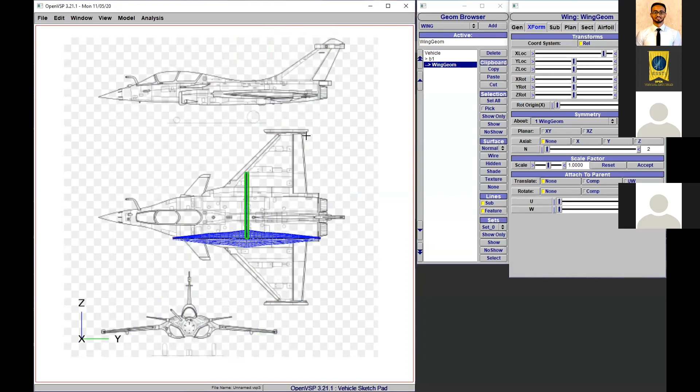If you have all these views of your background, then you will get perfectly the design or the design copy of the background. That is one thing important, especially if you want to design an existing vehicle type.

Okay, so we export it. We made export in the form of OBJ to Blender, and so I'm going to show you that in Blender. Let me close from this, and I'm going to go into Blender. Right here I have Blender.

Blender is not a must. This is for interior design. We finished with the exterior design, but this is for interior design.

Or maybe one thing I want to tell you is that after you design your aircraft, we'll see in the next series that you will take this aircraft into the flight control software, software in the loop simulation part, and you will use the designed vehicle into that gazebo simulation environment, and do all the camera and everything mounted into the UAV or the aircraft. Then if you are interested to track some ground vehicle, you will see how it performs. All the sensors are provided by the gazebo simulation environment itself, the virtual sensor, so you can do that.

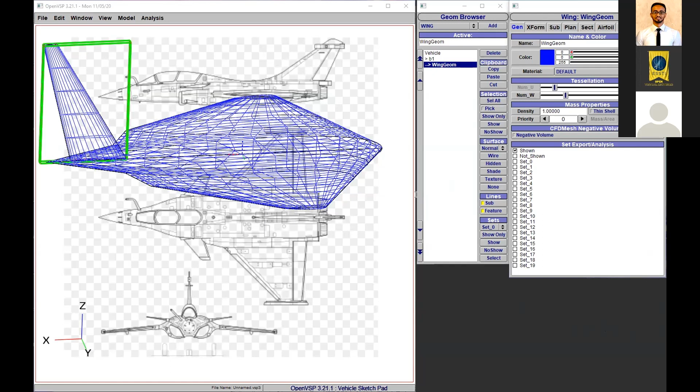Again, one thing I would like to say is that you can add components from here, and you can assign masses into it. It's not the realistic one, but you can put it, add, and assign the mass into it.

The length, the width, the height, everything is given there, so you can do that. Also, there's one point I'm not sure about - they added something into it, I think the pod, or whatever, the blank, so that you can put some objects inside the aircraft to see the weight distribution inside.

I'm not sure if this is a pod. No, there is no mass in it, but you can search by yourself and find what type of box or object you have to put inside, so that you can get this, this is the conceptual and preliminary part of the design.

So we don't care about that, we just care about the performance. But if you want the mass distribution, you just put those objects, and based on the shape, the volume, the length and so on, it will calculate the mass by itself.

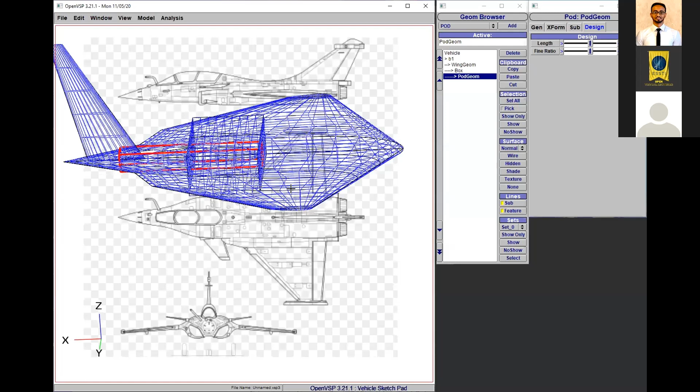But still, the software is under development. Questions are concerning these areas, like how we can be realistic on the material type and so on. But for now, this is, I think, enough to calculate things based on the density and the volume and so on. Okay, any other question?

Yeah, one last question. Yarit asks: if we don't select material, how could we do finite element analysis using OpenVSP? Oh yeah, okay, the finite element analysis, Mr. Rao...

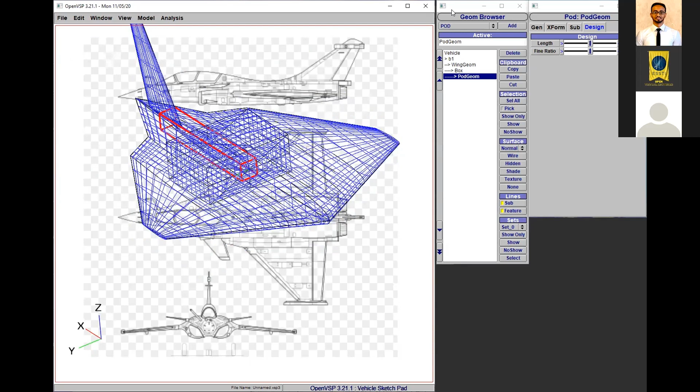If I get more information on that, I may send it to you through Betty or the others who are working in the team.